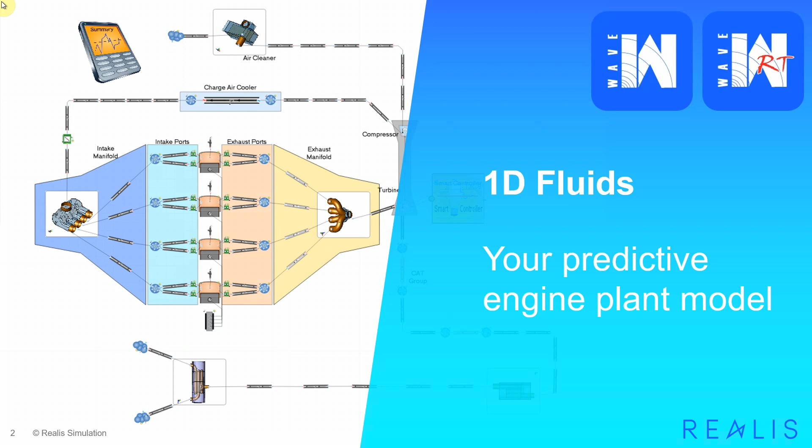Our 1D fluids products, your predictive engine plant model, include a number of capabilities delivering fastest on the market real-time physics-based simulation. Support for complex fuels is enabled by a detailed kinetics-based toolchain with resolution of fuel composition effects from properties definition down to combustion modeling and emissions.

Both the 1D Wave and real-time Wave RT deliver best-in-class acoustic predictions. These features are informed by our engineering expertise in our business, which is embedded in software workflows we deliver. Finally, 1D Fluids products are seamlessly integrated in the wider Realis ecosystem, including tools for system simulation, 3D computational fluid dynamics, and mechanical analysis.

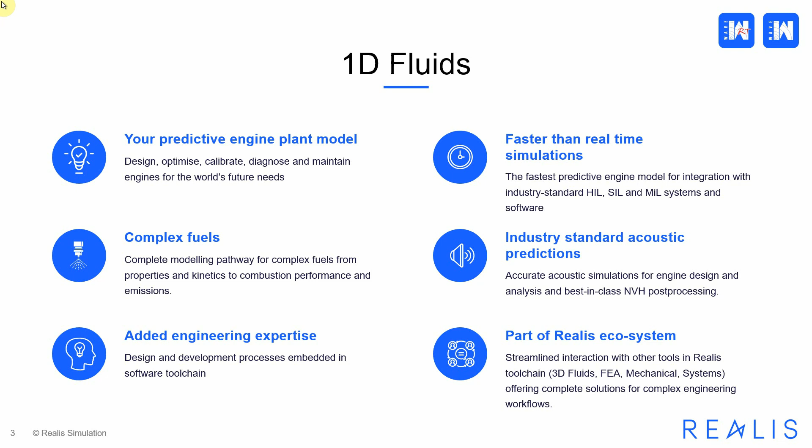This 2022.3 release of Realis 1D Fluids focuses on helping our customers address the challenges engine developers are currently facing, namely the drive to develop even more refined, low-emissions green powertrains, while at the same time reducing the costs of the development process. In order to address these challenges, in this release we focus on features which increase predictive capability, and also the workflows and user experience items which help save the most precious commodity of any digital analysis and digital engineering team, engineers' time, and which help distributed teams develop accurate engine models faster.

In this release, we have introduced new predictive models in Wave and Wave RT for diesel combustion and emissions, as well as UHC emissions for SI applications in Wave RT. We have also added an extended set of flame speed models for a wide range of gasoline blends, and we further improve usability of process setup for complex models with the delivery of the signal interfaces overview, part of our Clean Canvas initiative, session comparison tool, and new acoustic post-processing features.

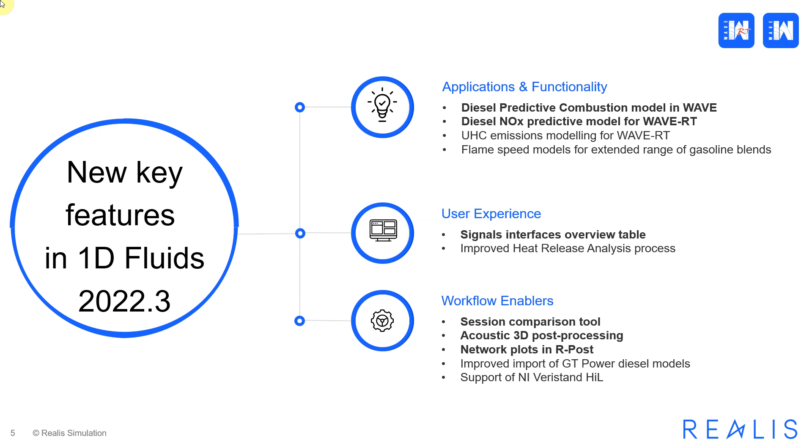Let us dive into some of these new features, user experience improvements, and workflow enablers, and consider what the simulation challenges are, what are the solutions we provide, and how our users can access these solutions.

Let us start with the new diesel modeling functionality in both Wave and Wave RT. The challenge we're considering is the need for increased accuracy in modeling of future heavy-duty and off-road sustainable diesel powertrains. Now more than ever, we need refinement and optimization of these powertrains to lower emissions and improve performance.

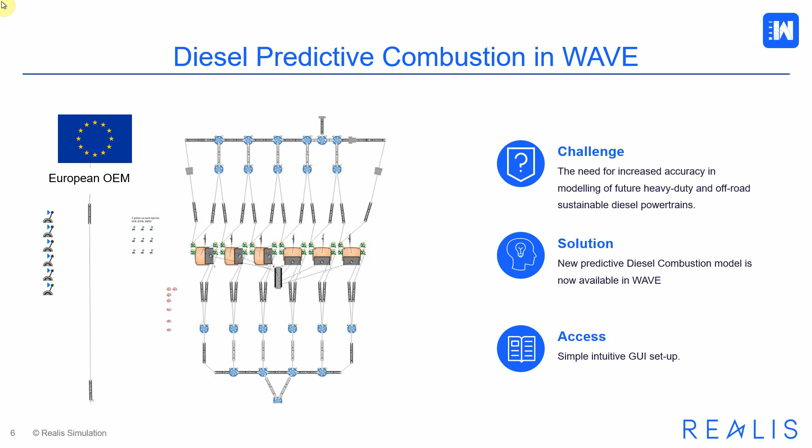Wave provides an answer in the form of the new diesel predictive combustion model. The model is based on the diesel predictive functionality which we released in WAVE-RT in 2022.2. It is accessed through a simple user interface with the same setup covering both Wave and Wave RT. The model supports multiple injection strategies, and the typical results are within percentage points of the test data for heavy-duty applications.

Accurately modeling emissions in real time unlocks the potential for the optimization of heavy-duty diesel powertrains for a lower carbon future. In this release, we have added a new diesel NOx model to our faster than real-time flagship product. The model is easy to set up and can be calibrated within minutes on high-performance computing clusters using advanced surrogate optimization, delivering results within 12% for NOx for full, part, and low load conditions.

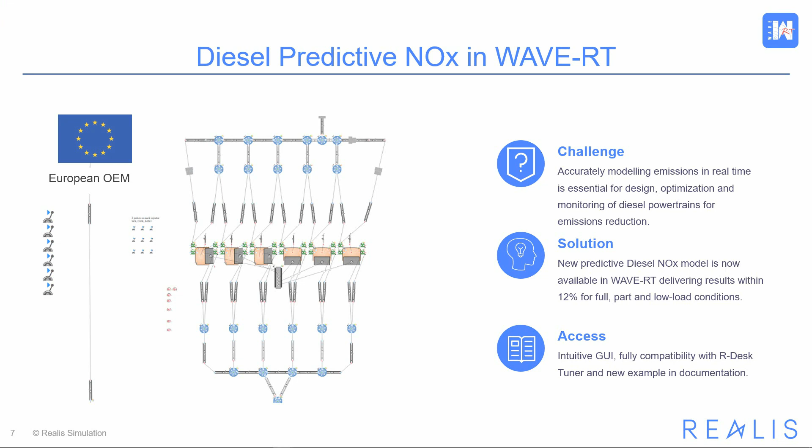Let us have a look at an example of application of these models in WAVE and WAVE-RT to a heavy-duty engine from a leading European OEM. The engine in question is a 6-cylinder, 6.7-liter heavy-duty engine, 104 mm bore, 132 mm stroke. The test dataset contains 97 operating points, featuring both single and two pilot injection strategies.

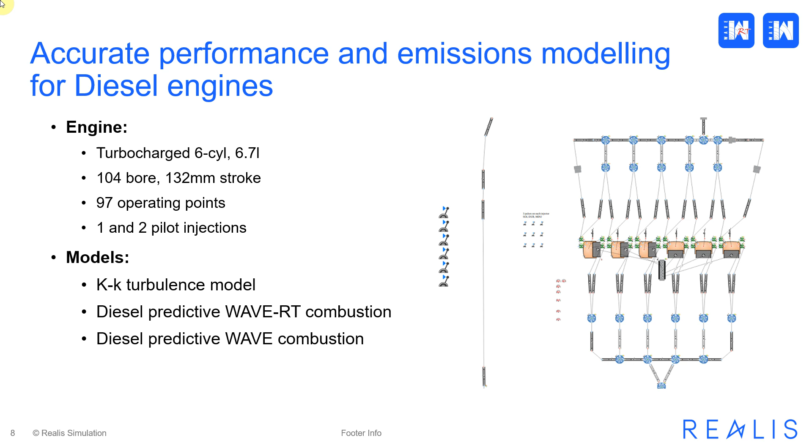The models applied to model physics predictively include the K-k turbulence model, which has been modified based on recent research at Oxford Brookes University, and diesel predictive WAVE and WAVE-RT combustion models.

In order to introduce the modeling approach and, more importantly, model tuning approach, it is necessary to note that predictive modeling for engine applications is a complex matter, as the engine represents a strongly coupled system, where flow and thermal behavior, turbulence, and combustion are intimately interconnected.

So in this case study, we are modeling and simultaneously tuning flow, thermal, turbulence, and combustion phenomena, and separately tuning the emission submodel.

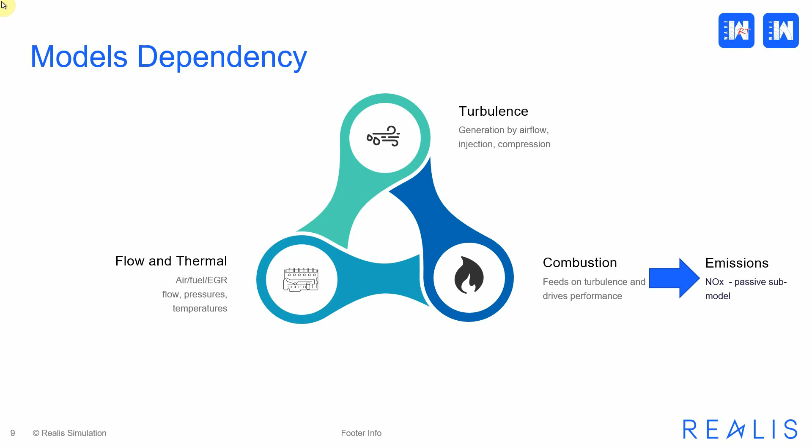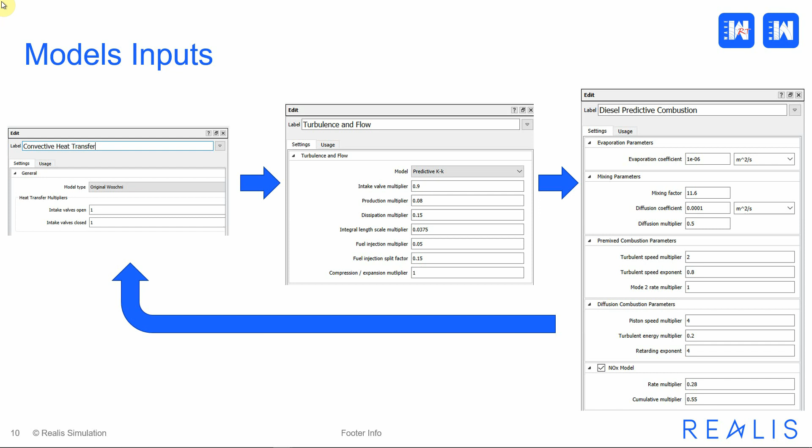For the model tuning, we use the capabilities of Realis RDesk Tuner. It's a built-in optimization tool which uses advanced surrogate optimization to automatically and simultaneously tune multiple parameters of the model to desired accuracy.

The reduced set of model tuning parameters, from all the parameters available for flow, thermal, turbulence, and combustion, is based on an extensive correlation study and is designed to capture all stages of diesel combustion: mixing, premixed burn, and diffusion burn. Convective heat transfer multipliers are added to the set, and we also add two calibration parameters for the NOx model: rate multiplier and cumulative multiplier.

The target parameters cover performance through indicated mean effective pressure and airflow, combustion through maximum pressure and the 10% and 50% burn points, and also engine-out NOx. The selection of tuning and target parameters for a particular class of engines is something which forms part of the optimal workflow which we deliver for our customers.

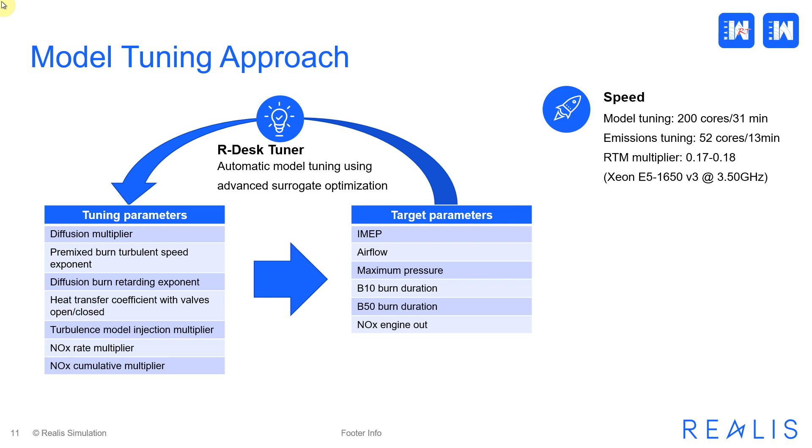The process of simultaneous tuning of multiple parameters for 97 cases of the operating map uses a high-performance computing cluster backend. The tuning takes 31 minutes on 200 cores, with the emission model calibrated separately, taking 13 minutes on 52 cores. The calibration process is extremely fast, helped by the real-time multiplier of the model in the range of 0.17 to 0.18, depending on RPM and load, on relatively moderate specification hardware.

Let's have a look at the results of the model. The comparison between test and simulation is quite good. We can see that the heat release rates are captured well for different pilot strategies, for full load, part load cases, and low load cases as well.

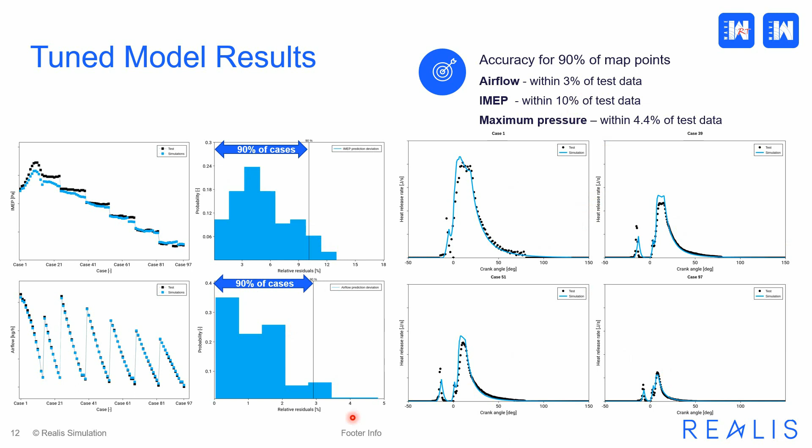IMEP and airflow are predicted to within 10% and 3% of test data for 90% of map points, and maximum pressure to within 4.4% of test data. We can also see that the probability distribution for the deviation of IMEP and airflow shows that we are more likely to find cases within this 97-case set with even lower deviations from the test data.

We can also see that combustion characteristics are captured very well, with 90% of map points for B10 (10% burn) and B50 (50% burn) within 2.2 degrees and 1.7 degrees of test data respectively. And the probability is well conditioned for both combustion points.

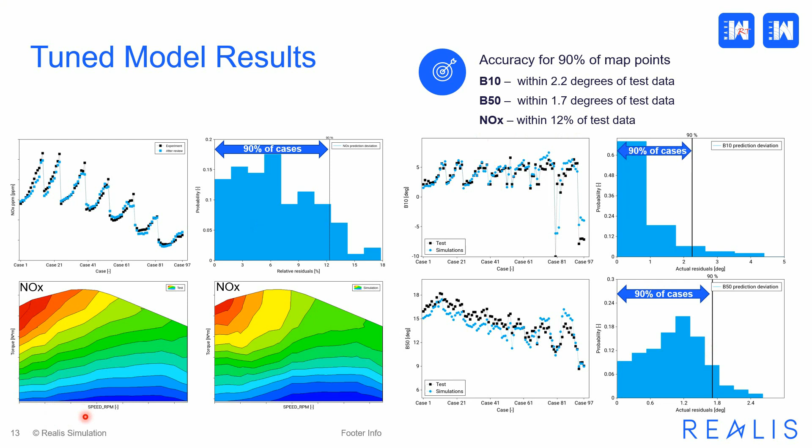Looking at the performance of our new 2022.3 NOx model, we can see that 90% of map points are captured within 12% of the test data. And the speed-torque map of NOx compares very well between experiment and simulation.

In order to demonstrate the performance of a new diesel predictive combustion model in WAVE, we took the settings obtained from our desk tuner for WAVE RT and applied these settings directly to the WAVE donor model. We can see that the results demonstrate excellent agreement with the experiment for IMEP, maximum pressure, and the 10% and 50% combustion burn points for low load, part load, and full load.

It's interesting to note that we can tune directly in our desk tuner the WAVE model itself, so it's possible to export an FMU of WAVE and use the FMU tuning task in our tool with the same surrogate optimization method. However, it's much faster to run the tuning on a faster-than-real-time model, WAVE RT, and the results are directly applicable to the donor model.

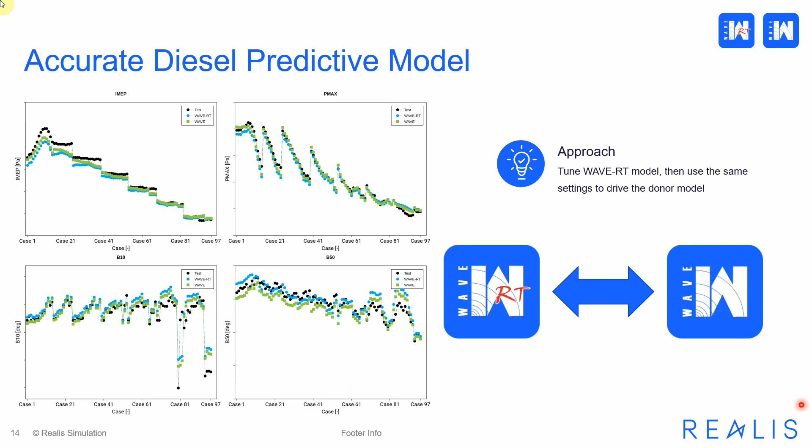Our next feature aims to address the challenge of accelerating acoustic analysis and help easy identification of resonances in the engine plant model network. Accurate representation of pressure waves and flow phenomena in 1D are essential, and this is where WAVE excels. However, it's also necessary to visualize this so that we can understand the behavior of our engines.

In this release, our post-processing and visualization solution, RPost, has been enhanced to allow users to plot flow quantities and pressure, as well as perform frequency analysis in the wave flow network. The new network plot also benefits from all the data manipulation facilities available in RPost. Let's have a look at how it works for this model of a 2-liter turbocharged gasoline engine.

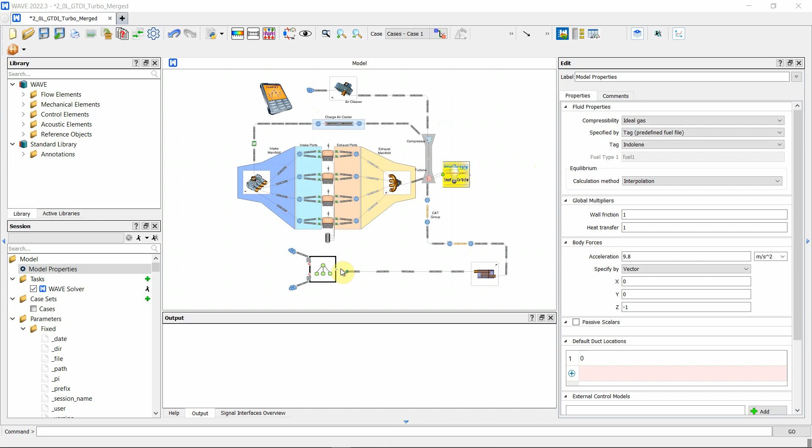In this model, we have a number of complex components which can make acoustic visualization and flow visualization interesting. I'll focus on the two mufflers, and specifically on the second muffler, which has been merged on canvas and is represented by the submodel here.

In order to have the data available for visualization, we need to prescribe that this data should be stored during the simulation. In the WaveSolver solution, in the Outputs tab, we can see the outputs, and here we can add values which will be available for the network plot. In this case, I have added basic pressure and temperature so that we can see the pressure waves as they enter the muffler.

Once the WAVE solution has been completed and the data is available, we can open the data in RPost.

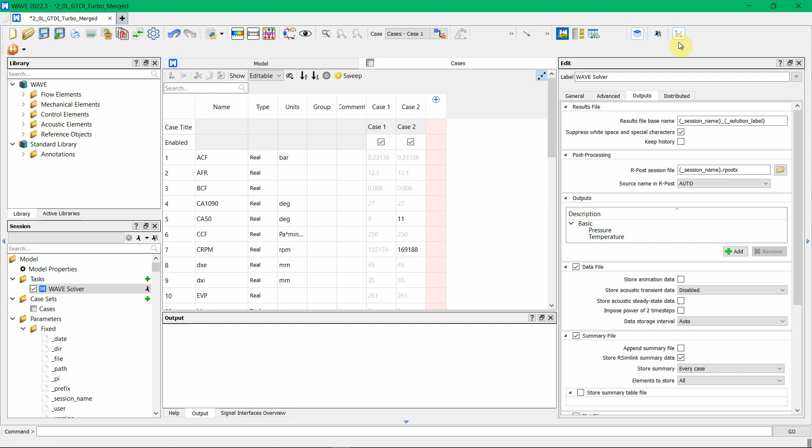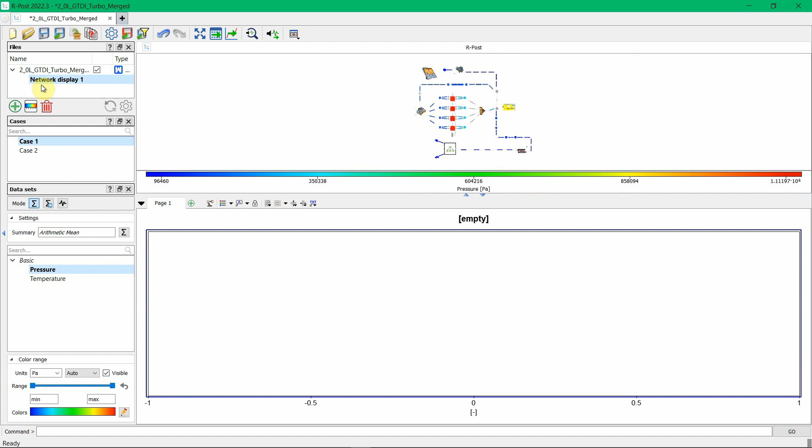For this model, we can create a new network plot by clicking on this button. The network display provides a contour plot, a color plot of values for which the data is available in the model on the canvas.

We can browse the cases as with any Wave visualization. Here we have two cases simulated for this model, and we have a number of data sets available: the summary data we requested, pressure and temperature, and also the data Wave outputs by default when switching appropriate settings in the output panel, such as densities on the left and right side, heat transfer properties, mass flows, etc. for ducts and Y junctions.

We also have the ability to conduct frequency analysis. Frequency analysis is conducted on pressure, and we can visualize the frequency either in linear mode or by looking at decibels. Now let's have a look at what's happening near the muffler as an example.

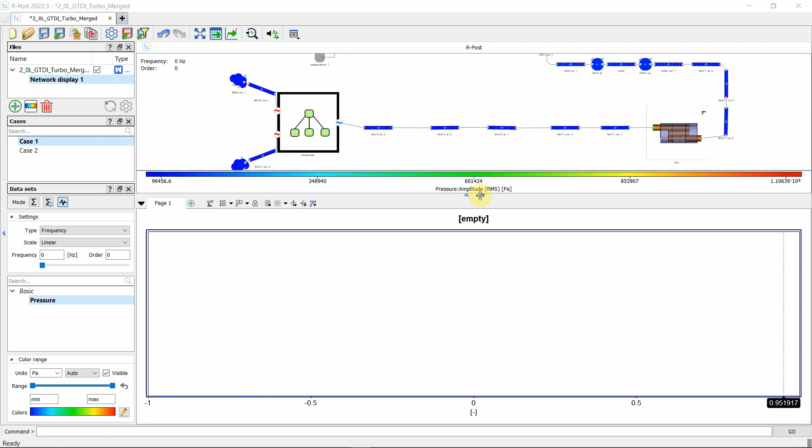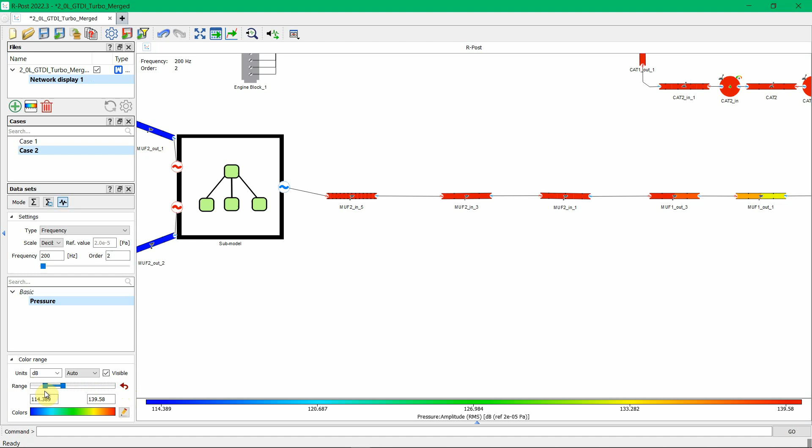I'll collapse the plot to give a slightly better view, then switch to frequency. Let's say, for the second case in the simulation, switch frequency to decibels and look at the second order, and adjust the scale slightly so the wave is more visible. Okay, that's better. So we can see the higher RMS of pulsations near the entrance to the muffler.

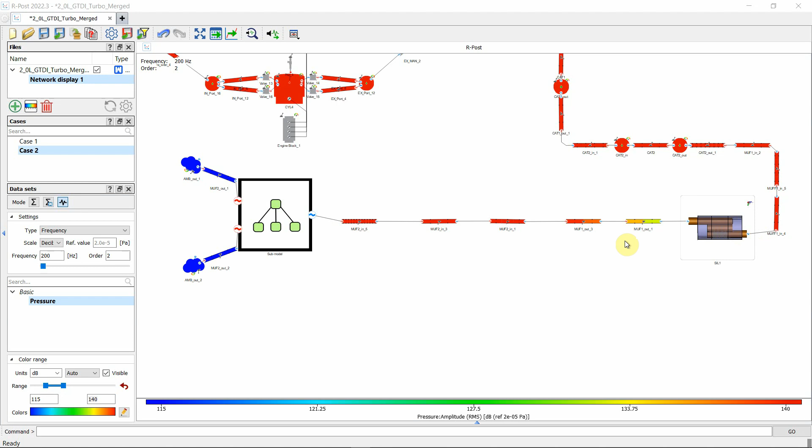On R-Post canvas, we can dive into the component representing the muffler, and it's also visible how the wave which enters the muffler is dissipated. In this case, there are no interesting resonances happening in the muffler, as the muffler has been well designed and it's doing its job well.

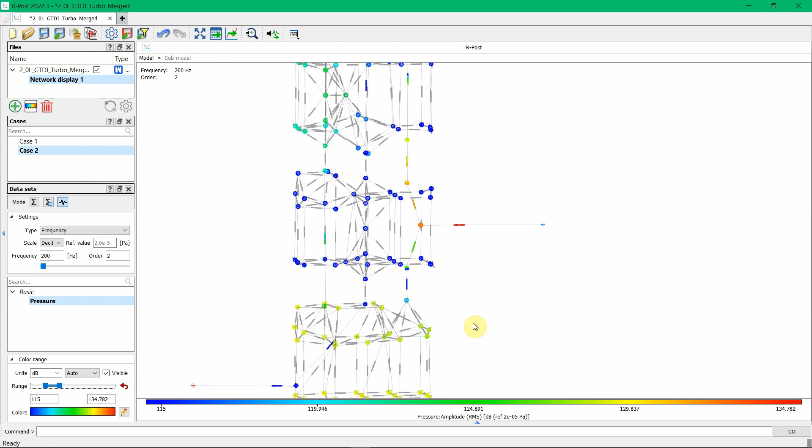This new functionality in R-Post is covered in detail in our documentation, and our existing acoustic tutorials in Wave have been enhanced to illustrate the post-processing using R-Post.

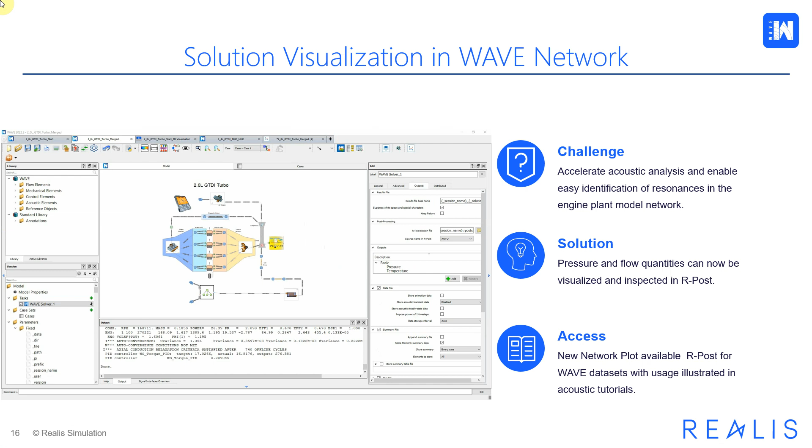Visualization in 2D on a wave-flow network provides a great method for analysis of pressure distribution and pressure pulsations. However, for complex geometries, a better insight can be obtained by directly examining distribution of flow quantities, pressures, and pressure frequencies in 3D. In this release, we introduce a new feature to address this challenge and enable precise analysis of pressures and temperatures in complex exhaust, intake, and muffler components.

The feature is available through a new 3D visualization task in Wave GUI. Users can access time data, cycle averages, and frequencies, and export these into 3D, simplifying both analysis of component performance and, equally important, communication of results to end customers or a design team.

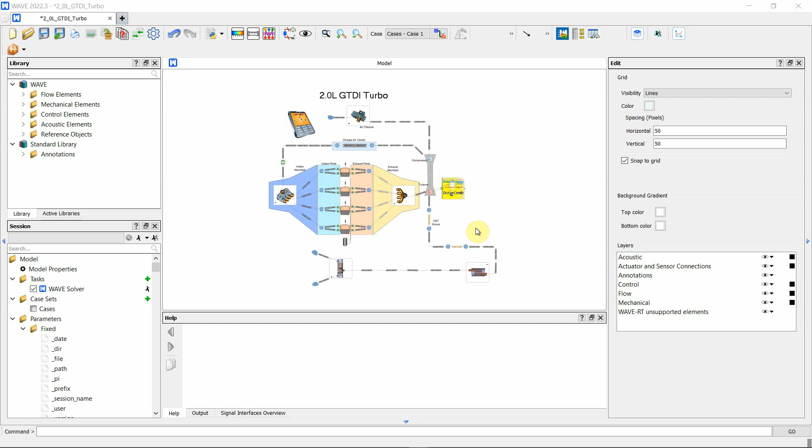Let's have a look at how this feature works using our 2-liter turbocharged gasoline engine example. The engine we are using for this demonstration is the same engine we used to illustrate network plots for Wave in R-Post, however with a slightly different modification. In this modification, the second complex muffler has not been merged or decomposed into 1D elements, but instead is represented by a complex component.

In order to visualize the solution of this complex component, I'll add a new 3D visualization task to the model. This task allows me to configure what I'm exporting, how I'm exporting it, and what 3D geometry I'd like to cross-plot the results with.

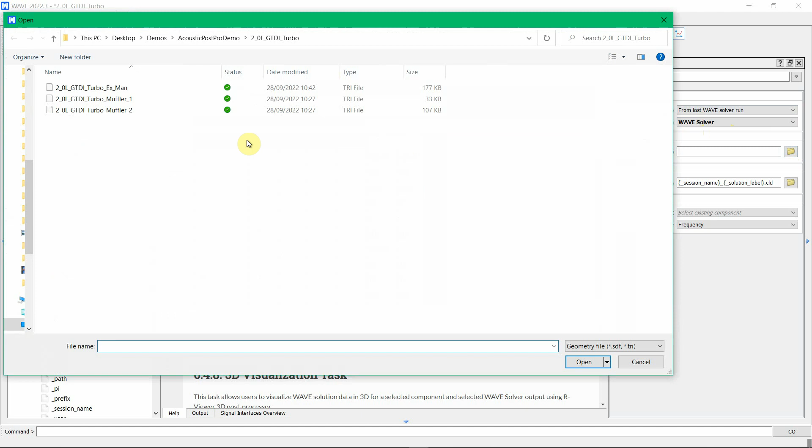For the data source, by default we're picking up the last Wave solver run, but we can select a specified WVD results file. For the geometry, I'll select the geometry of the second muffler here. This geometry is in Realis standard tri format, and this type of geometry is exported from other tools in the Wave toolchain, namely from Wave Build 3D.

The output then defines the name of the point cloud file where the results are stored. The solution is visualized in a point cloud file where points correspond to the locations of the data in the Wave model. And finally, what would we like to process? We'd like to process the second muffler component, and we want to see frequencies.

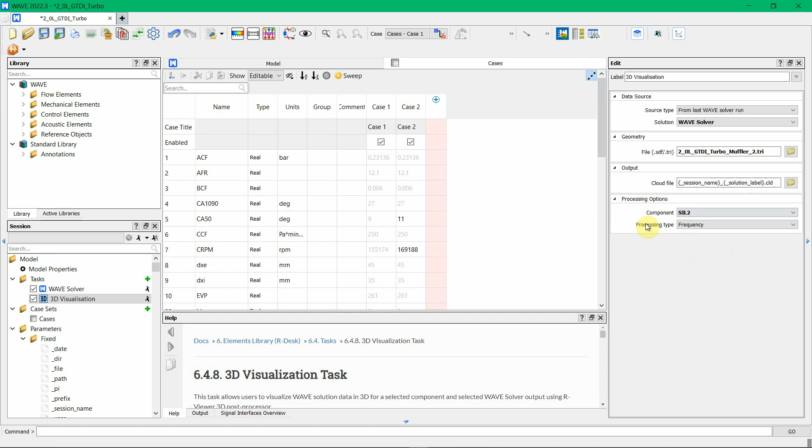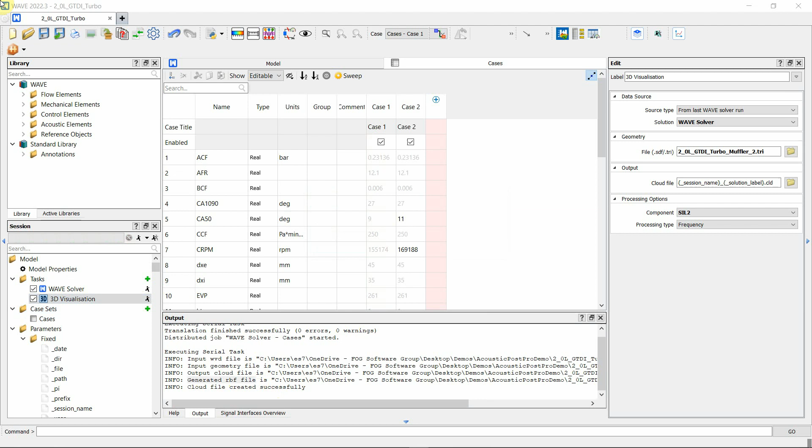When we run the 3D visualization task and save the session, the task extracts the data, translates it into a viewer format, and creates an RBF file, the batch file, which we can open in our viewer and which generates the visualization. Let's open our generated batch file in our viewer.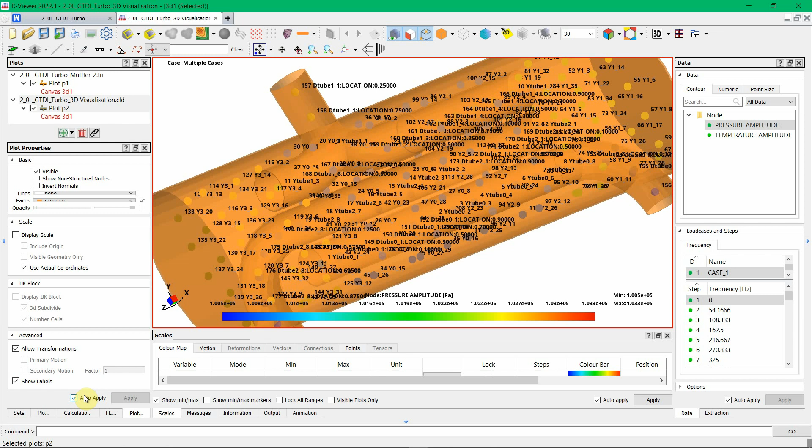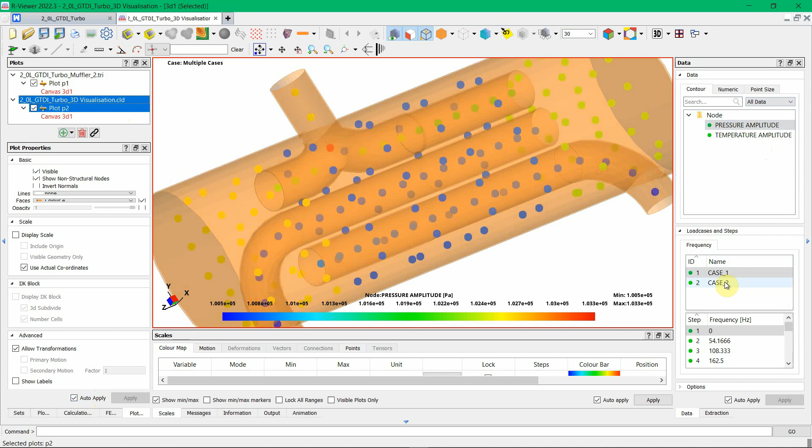So let's have a look at the wave in the second order, which enters the muffler and dissipates in the muffler. In order to do this, first I'll hide the labels, and I will also slightly increase the transparency. Then in the point cloud, you can see the data sets which are available to us. So we're looking at pressure amplitude for the second case, and for the second order at 200 Hertz.

It's highlighted slightly so that it's clearer, and we can see this high amplitude entering the muffler and then low amplitude elsewhere in the muffler.

Now, point cloud visualization in our viewer is a very powerful method of visualization. So we can examine the data, or we can adjust the data and grade the points according to the data values, and we can also probe individual data points to find out where in the wave model the data point is, and also what the exact values of pressure amplitudes in this case are.

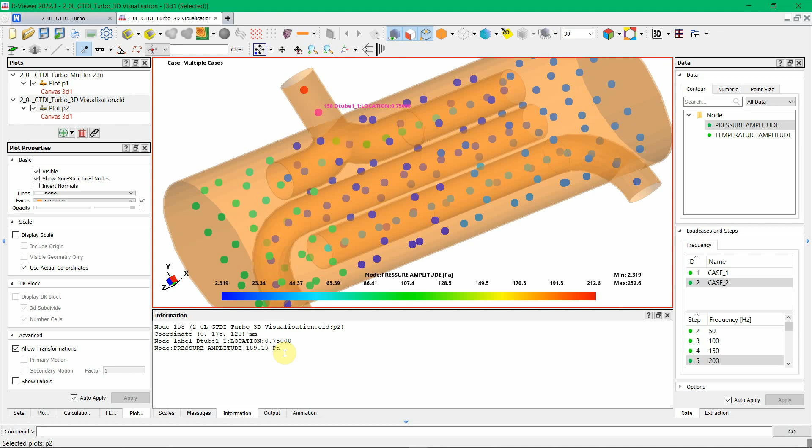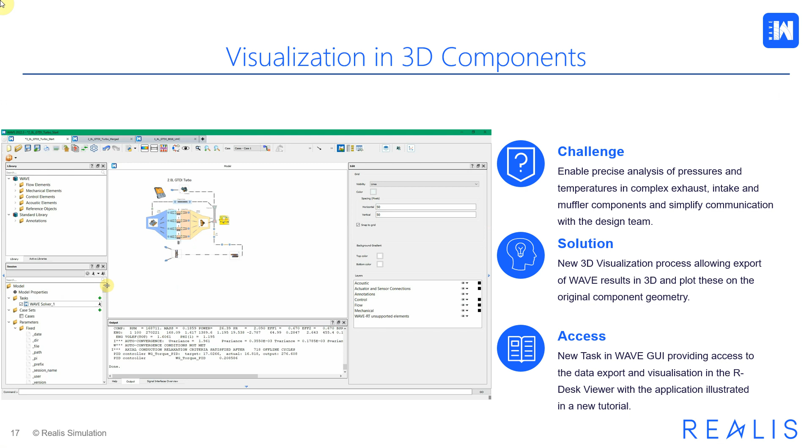A full description of this process and its usage is available in Wave Help and in Wave Manual, and also 2022.3 installation includes a new tutorial demonstrating how 3D visualization can be applied.

Our next new feature aims to help our users accelerate engine plant models development and also reduce the possibility of user errors. Complex engine models can feature hundreds of sensors, actuators, and control signals. In previous releases, we have introduced new clean canvas methods, which allow users to easily connect these to their engine model. Mistakes in connectivity or units can cost valuable engineers' time,

and in this release we introduce a new signal interfaces overview, which allows users to easily examine important properties and connectivity of actuators, sensors, and send and receive signals in a single compact table view, and also navigate to the related elements in the model. This functionality makes it much easier to inspect and troubleshoot complex models, and it saves the most valuable resource of any CAE team, which is time.

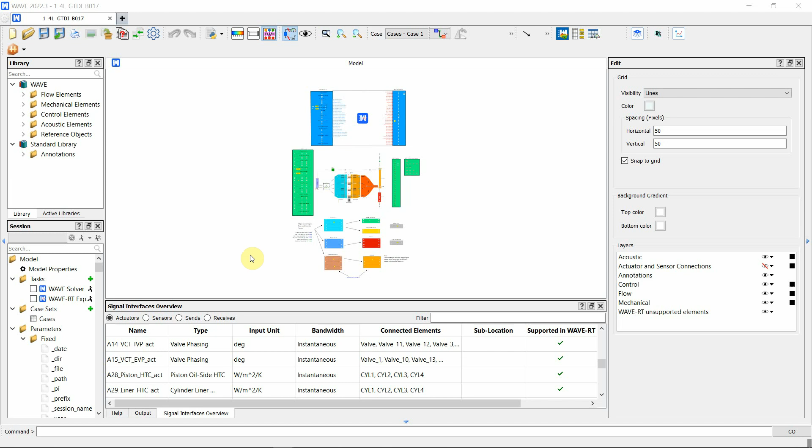To illustrate the signal interfaces overview, let's have a look at our 1.4 liter turbocharged direct injection engine example from our tutorial database. When we open the model, the signal interface overview panel appears, and it allows you to see actuators, sensors, send and receive elements present in the model. It also provides a handy field which can restrict the view to elements with a specified name.

The table itself provides access to properties which are most interesting to inspect. For example, for actuators, we can see the name, the type, input unit, bandwidth, connected elements, sublocation, and also whether or not this actuator is supported in real-time WAVE-RT tool. It also provides access to navigation.

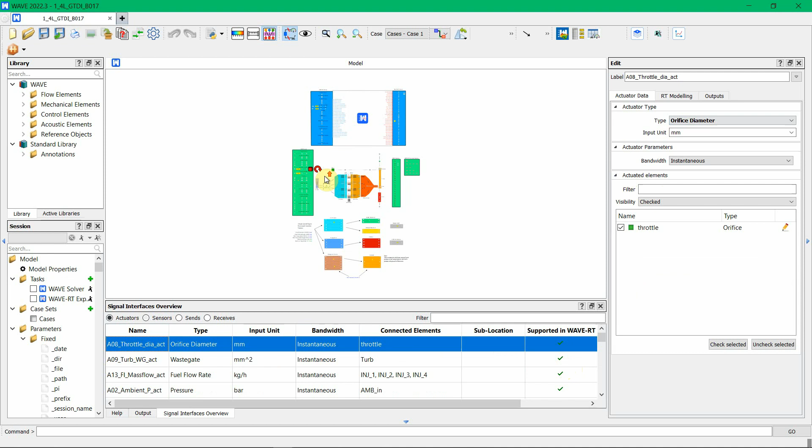So, for example, by clicking on actuator here, we get the edit panel of this actuator, and the actuator is highlighted on the canvas. In the edit panel of the actuator, there is also a list of actuated elements, which shows that throttle is actuated, and we can get the throttle properties by clicking the pencil button in the edit panel. Similar navigation is available for all the other elements, sensors, sends, and receives.

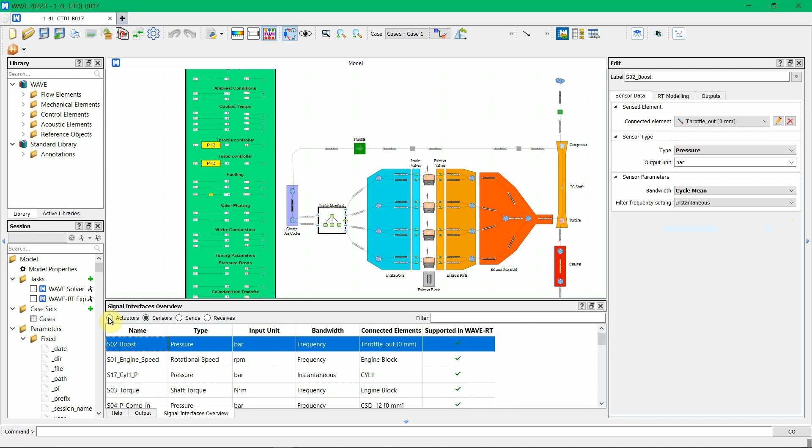This simple functionality provides us with a very convenient way to have an overview of all the connectivity of actuators, sensors, sends, and receives in a single place, covering the complete model. And it helps us inspect this connectivity and avoid mistakes in the connectivity, which ultimately saves us time down the line. The access to this functionality is enabled by default.

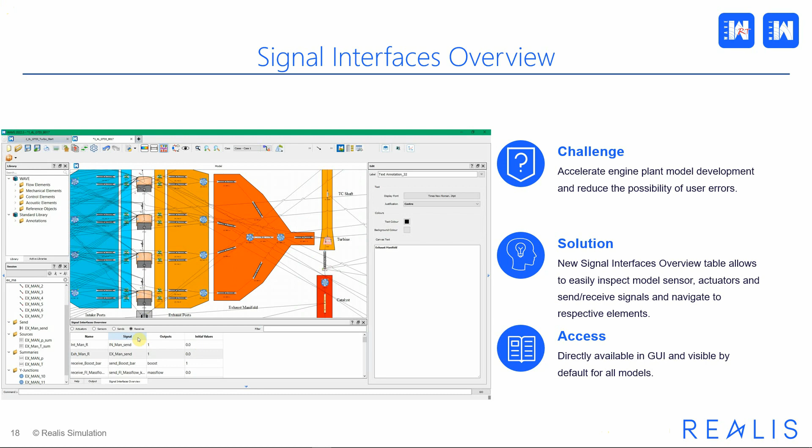So all the new models or existing models will have the signal interfaces overview table when you open them. It's described in detail in our manual, and also because it's there by default for all the existing models, it's also illustrated through the existing Wave tutorials and examples.

The last productivity feature of this release is designed to save time and help simplify collaboration between team members. It is the comparison tool, which is introduced in Wave plugin in 2022.3. This tool allows engineers to compare sessions and identify the modifications made in an easy-to-read tabular format, either directly in the GUI or in Excel.

Apart from providing a handy comparison between different model builds, this tool can also be used to troubleshoot models by comparison with the correct reference model. Examples of issues in the model, which can be easily identified by such a comparison, include mistakes in the input fields and units, incorrect connections, etc.

Let's see how this tool can be applied to compare models and identify mistakes or modifications using our 1.4-liter turbocharged engine example. Let's go back to our test model and make some modifications representing common mistakes or legitimate changes in the model, and then compare against the model reference to illustrate how this comparison works.

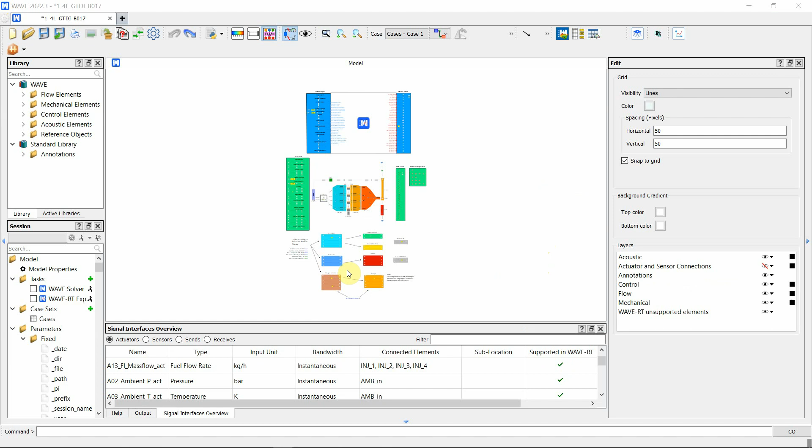So in this model, I'll introduce a mistake in units, which is a common user mistake during model building. So I'll take the ambient pressure actuator and change it to actuate kilopascals. Also, I'll change the unit of the sensor to pascals, change the bandwidth, and actually connect it to the wrong cylinder as well.

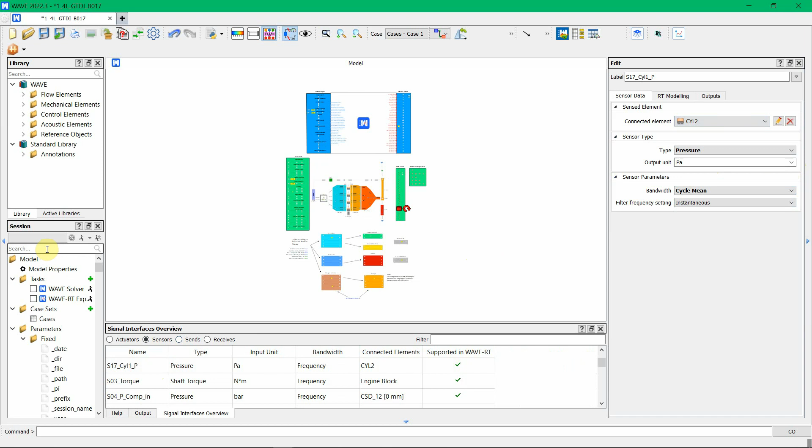Then we'll make a legitimate modification which another team member did when tuning, for example, post-flame oxidation model. Let's say modify the constant, and introduce another change which is more representative of a mistake when copy-pasting data from Excel. So, for example, we will take exhaust manifold temperature from a different place, and it's slightly different than the original model.

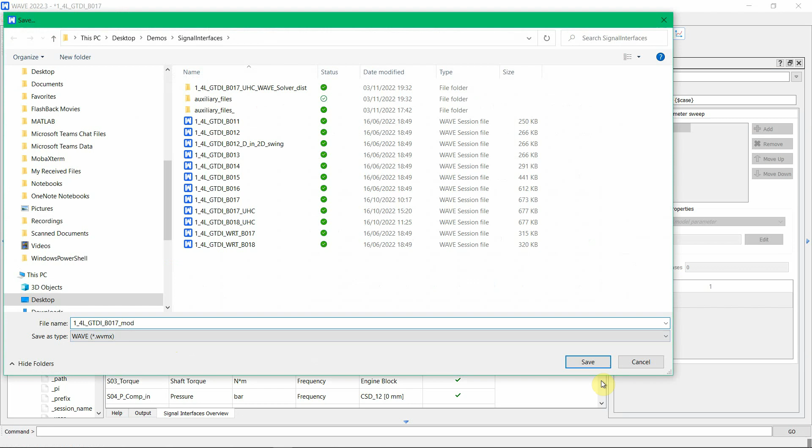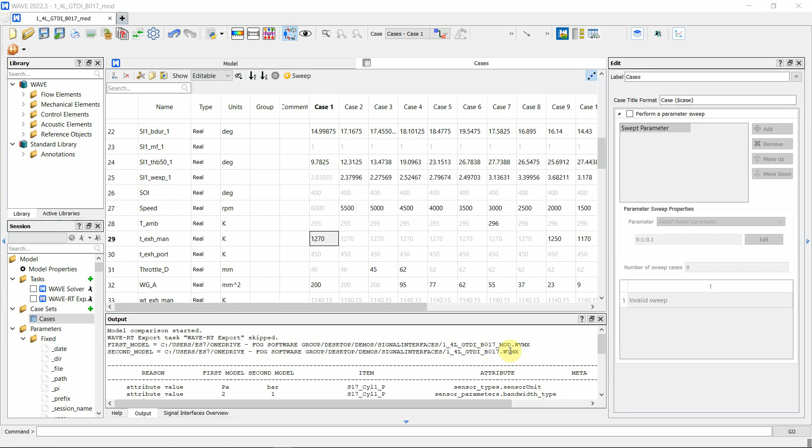So we'll save this model under a different name, for example, modified, and then use the comparison tool, which is available through this button on the toolbar, and compare with the previous session. The results of the comparison will be summarized in the output window. So here we can see that our current model, B017 mod, has been compared against the reference B017, and the table below provides the list of changes which were done between these two models.

For example, we can see our change in units of the sensor for cylinder 1 and for actuator for ambient pressure. We can also see our changes to the temperatures of the exhaust manifold. It is very convenient to view these differences directly in the output window. However, for models where the number of differences is very substantial, the format of the output window may be not amenable to displaying very long lists of differences.

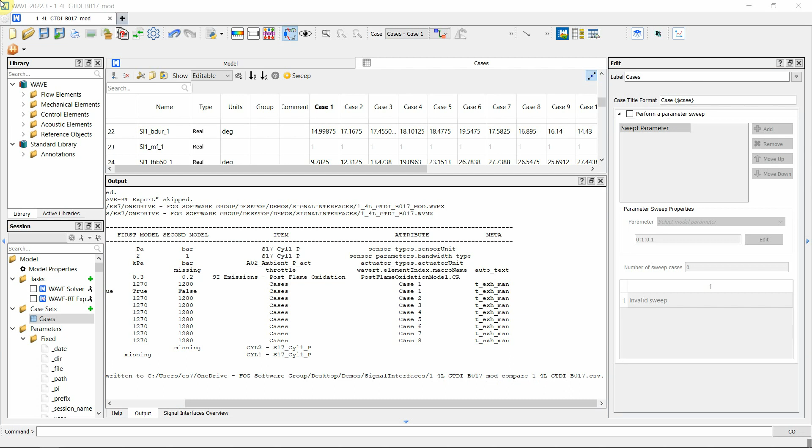So in order to help our users analyze differences between such models, the comparison tool also outputs a CSV file which can be read in Excel. So we can see here that the results of the comparison were written to a file, and the CSV file appears with the name of the first model, _compare, name of the second model. The comparison file appears in the session directory. We can open it in Excel. And once it's in Excel, we can easily filter and sort by the reasons of differences and examine cases where the number of differences is substantial.

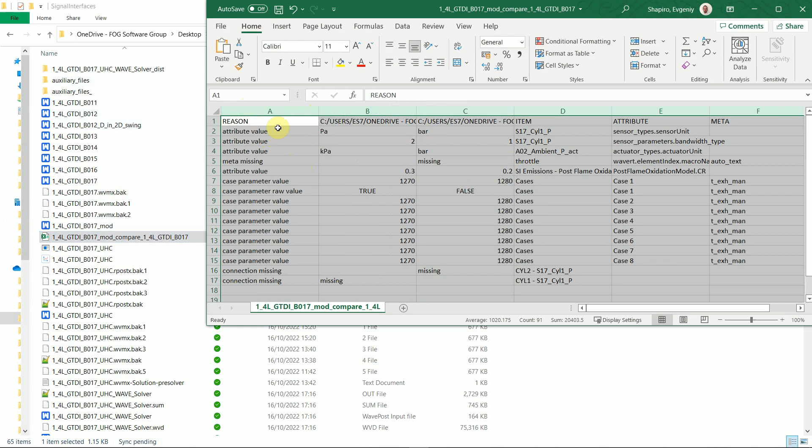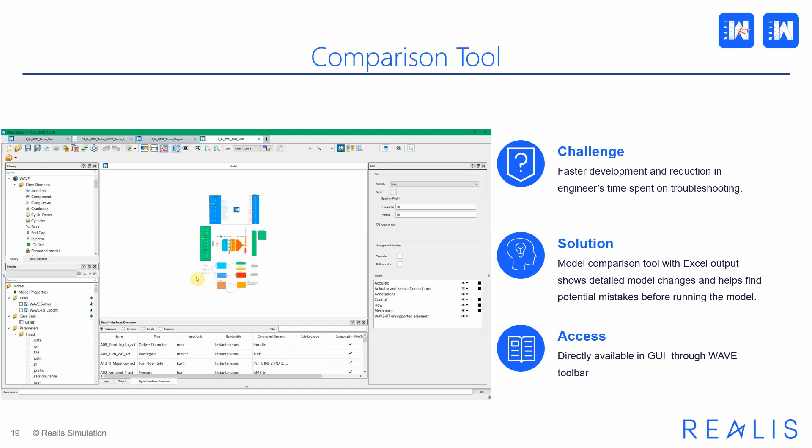The resulting functionality makes it easy for our users to examine differences between different builds of the model and also catch mistakes in the model and compare their model with the models modified by their colleagues. Apart from the headlines, this release is packed with other enhancements for Wave and Wave RT. We have a new sensor to report valve event angles at user-defined lift height, which provides users with complete flexibility with respect to using valve opening-closing reporting with their workflows.

We now export time-based injector types to Wave RT, and we support PID controller in Wave RT as a direct export from donor model. We have added the ability for tuner to store time data for the last cycle. This is a new output which simplifies substantially comparison of test data for pressure and heat release traces. In 2022.3, our desk tuner should be tolerant to model divergence for Wave RT. Sometimes, too generous tuned value limits specified by the user can drive the engine into an area where convergence is problematic. For example, combustion is too fast to be resolved with specified Wave RT timestep. This new feature makes tuner ignore such points, ensuring that we can get correct results from the tuning, even with the mistakes in the setup.

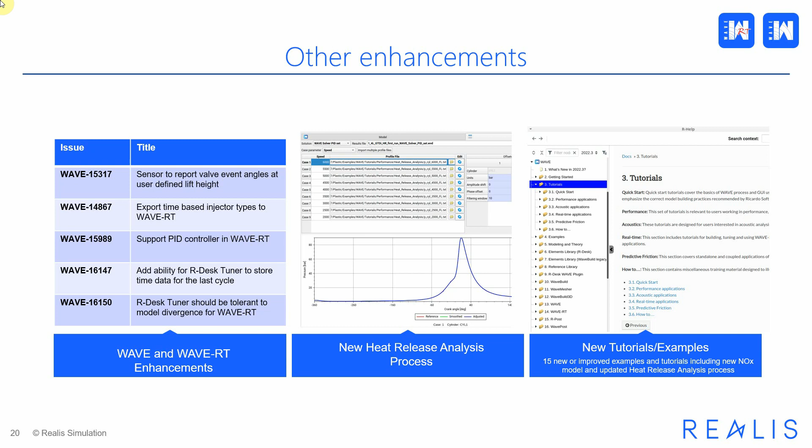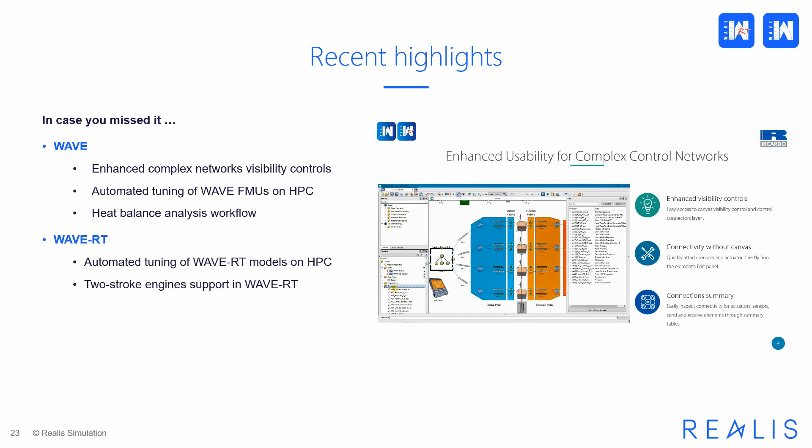This release builds on the strengths of Wave and Wave RT delivered in the previous releases, and we'd like to draw your attention to some of these, including for Wave, enhanced complex network visibility controls, making it easy to deal with models featuring hundreds of sensors and actuators, automated tuning of Wave FMUs, including using automated tuning on high-performance computing backend, and the new workflow for heat balance analysis. And for Wave RT, automated tuning of Wave RT models on high-performance computing clusters, and full two-stroke engine support.